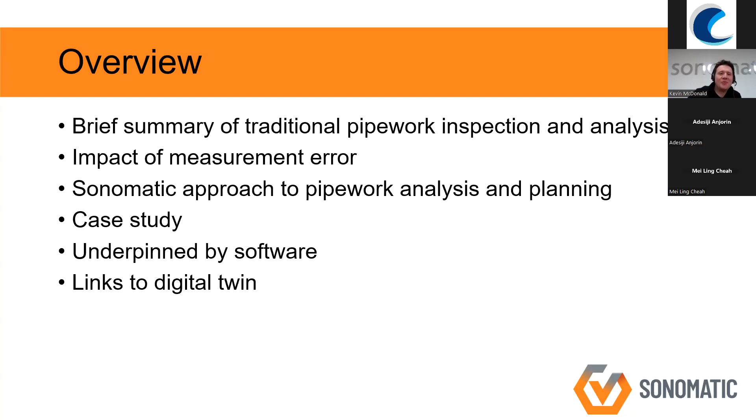Beginning with an overview of pipework inspection and what happens in traditional settings. It's mainly used extensively with manual UT and radiography. Someone will go out and take a spot reading at a predefined inspection location. This is then recorded in a database along with all the other readings that's ever been taken on that specific component at that same location.

And then there's some analysis subsequently performed on these readings, generally quite limited analysis. This does amount to quite low coverage - in some cases as low as 1% inspection coverage for the pipework circuit. Now, while that's an acceptable strategy if you've got predictable or extensive corrosion within the circuit, that can be problematic if you've got random or localized corrosion, because you're very unlikely to find it based on that sort of rigorous fixed approach.

Coupled with that, these two points largely go hand in hand. So if there's any issues at a particular location, generally actions are taken on a per location basis, and only what I've called panic readings are acted upon. What I mean is, if a reading at a specific location has seen a noticeable drop in thickness since the previous inspection, that tends to be focused on and acted upon in isolation. From what we see, it's not often fed back into the planning phase to take account of other locations that could be seeing similar service, which may need additional focus in the future.

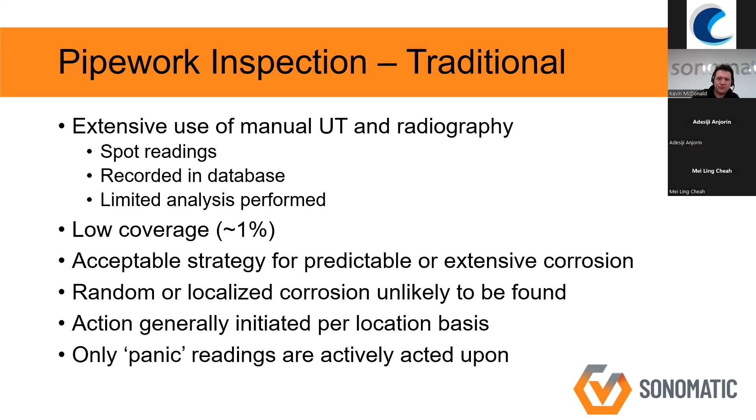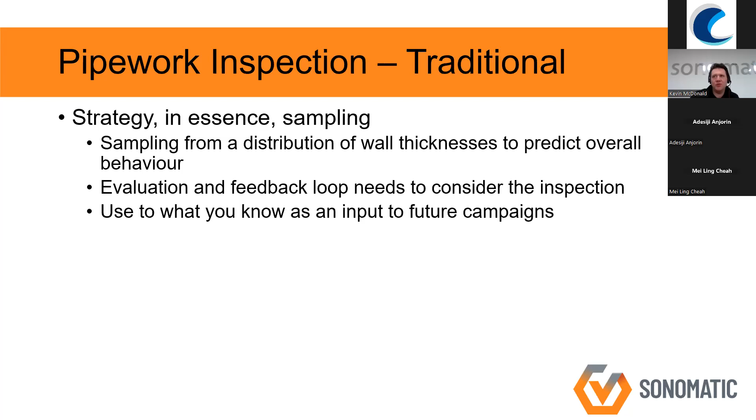However, that strategy does, in essence, become statistical sampling, because what you're doing is taking a distribution of thicknesses in order to try and predict your overall behavior. However, what's missing from what we see is an evaluation feedback loop to consider the inspection, both in terms of what has gone before and what you're expecting to find going forward. In a nutshell, we try to use what you know as an input to future campaigns - use what you know to guide what you expect to find in the future.

I mentioned this may be impacted by measurement error, and what I mean is the analysis on spot readings generally amounts to a corrosion rate calculation, which is just the difference between the two readings divided by the time in which those readings were taken. That can be heavily influenced by measurement error for several reasons. One is location, and that image on the right is my attempt to describe the impact location can have between multiple inspections.

So the point is, if you've got a pit, for example, in your first inspection you measure it accurately, and in the second one you get the exact same location, measure that same pit, and you will get a representative corrosion rate calculation at that location. If, however, you either miss it completely and catch it the second time, or partially catch it on the first and second inspections, then you're not going to get a true reflection on corrosion rate at that location, which can lead to incorrect decisions being taken.

Also, the technique deployed can have an impact. The probability of detection of ultrasonic techniques can vary from one technique to the other, and also the applicability of the technique versus what corrosion is being expected to be in place. Because the shape, the form of any corroded feature can have an impact on which techniques are most likely to find it and measure it accurately.

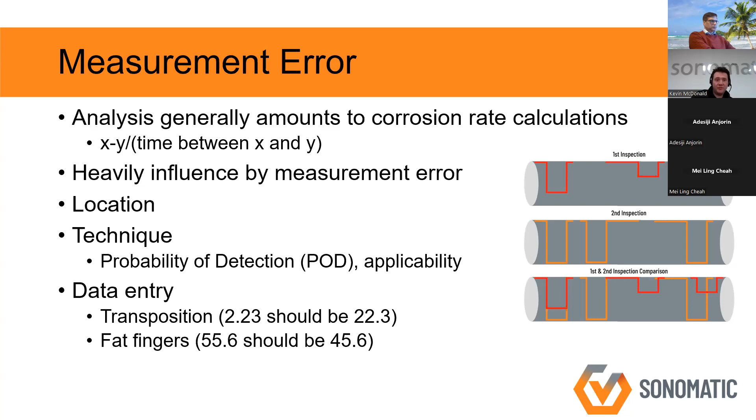So what we do as a company, we first try to understand the overall corrosion behavior and deliver an analysis based on that. It's probably easier to explain as I go forward, so we'll come back to that in a slide to explain in more detail what I mean by that.

What we do is we start with an overview of the whole inspection history and then drill down. We start looking at the overall trend of inspection data, and then start looking at individual groupings within that data that are behaving in a similar way, in order to start making good or better decisions based on similar behavior within your sample set.

So there's four differentiators compared to the traditional approaches, as I'm calling it. First, the recognition of sampling from a distribution that I mentioned earlier. Also, the response to measurement error - I'll cover how that's mitigated against as far as possible on a later slide. We also utilize an integrity group-based corrosion rate and corrosion coverage information, which I'll cover with examples slightly later. And then finally, the aim is really just to improve efficiency and effectiveness of the whole inspection cycle - essentially just making better use of resources as a whole.

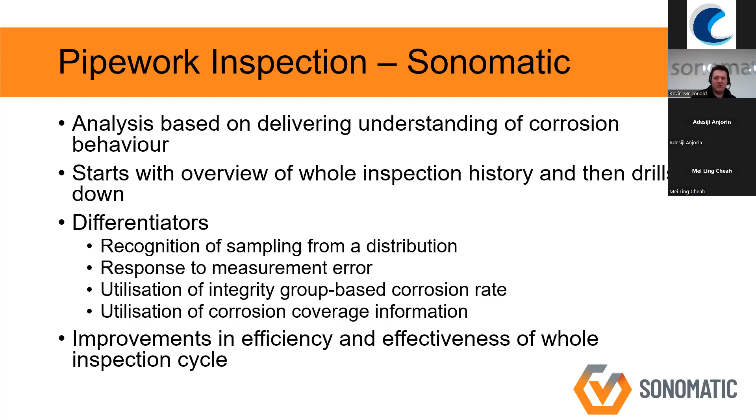The other thing that needs to be considered is how corrosion is behaving spatially, which is something else we see that isn't often considered in terms of pipework inspection. So it may not look like it, but all these images here have the same minimum value, but they look incredibly different. The point being, depending on how your corrosion is behaving, this will have a significant impact on your inspection strategy.

Because if you take the top image, for example, it's very heavily corroded, very extensive, and very uniform. So if you take a small sample from that particular piece, it will give you a lot of information on exactly what the overall behavior is. However, compare that to the bottom image - there's one single isolated pit, and a low coverage approach means there's a good chance you're going to miss that pit if you just take a small sample. So it's something else that needs to be built into and reflected within the inspection strategy.

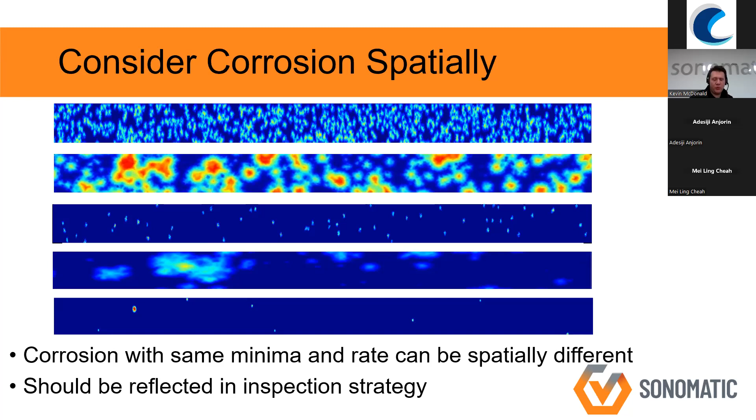So what we do initially is we start with box plots, which gives an overall inspection history in one view. For those that don't know, a box plot is just a way of visualizing a data set as a whole. On the x-axis here is inspection year, and the y-axis is a normalized value. The normalized value is the inspection result divided by the nominal thickness, in order to allow various schedules of pipe to be compared initially in one go. The reason for that is, often within a pipework circuit, you can get multiple diameters, multiple thicknesses, all within the same circuit.

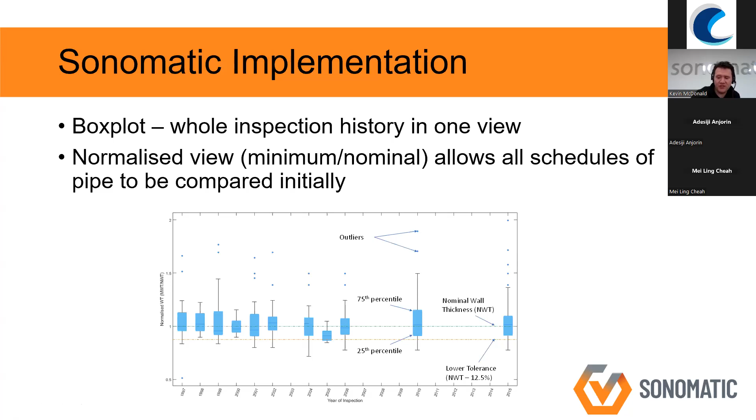The reason we do this is because box plots are a very good way of giving an initial overview of long-term trends. The image on the right shows a circuit where there's been multiple inspections ranging from 1997 up to 2015, but it's largely stable. There's been minor variation in the overall value, but there's no evidence of a downward trend here. Nothing that would be significantly concerning if we were to see that, certainly on a standalone basis at least.

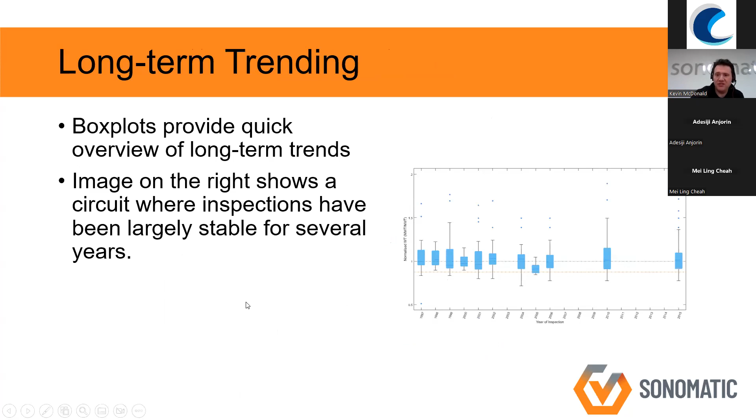This is an entry point, for the reasons I just explained. It raises questions based on the knowledge of the circuit. We would just give a very general, quick initial overview of what we're seeing in terms of general behavior, before we would then look to take that insight and look at the groupings of various data points to gather everything that's behaving in a like manner together. That could be based on materials parameters, could be based on feature types - straights, bends, etc. It could be based on process groupings. Diameter is another one very common.

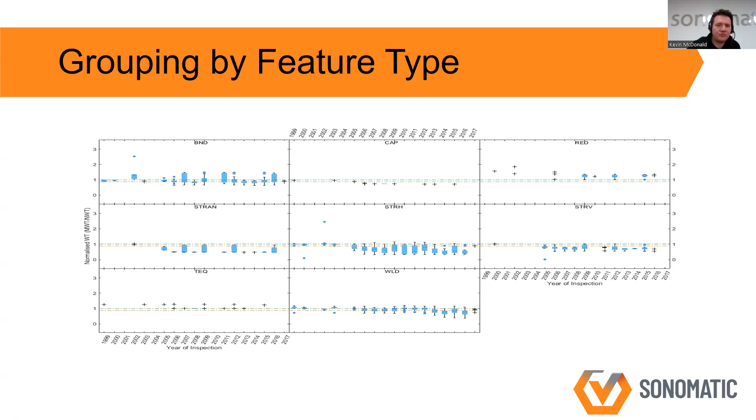So I mentioned that group-based integrity corrosion rate. How we produce our corrosion rates is we do trending based on each particular grouping that we identify as being of interest or of relevance, and we trend on the wall loss percentile values - in other words, the nominal minus the difference between the minimum value and the nominal thickness. The reason for that is because looking at group trends and taking a more long-term view does mitigate against measurement error that I mentioned earlier.

It mitigates against it in the sense that we just accept that it will happen, because there's some things that you will never eliminate in terms of measurement error. By taking a more long-term view and spreading that over the history and all the data that has been gathered, it will never eliminate the measurement error, but it will nullify it as far as possible. The reason being, it does allow us to make more accurate short and long-term corrosion rate calculations.

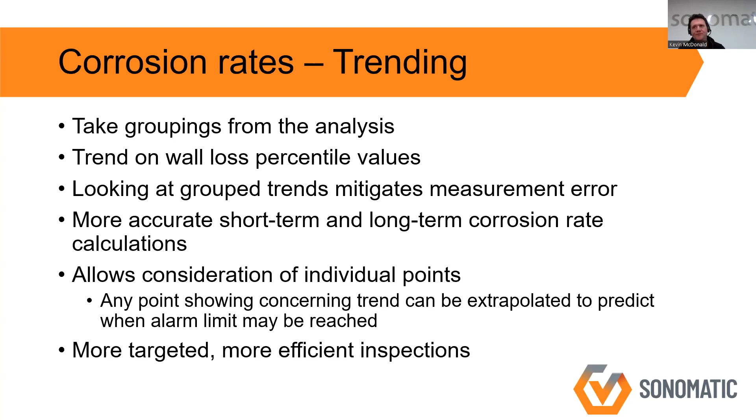However, we can also just take a consideration of individual points. I mentioned earlier that some points may see a noticeable drop in thickness for whatever reason, so that also can be built into the analysis. We can isolate a single point and, if necessary, do trending based on the behavior at that single point rather than a group-based activity, to predict when, for example, an alarm limit such as minimum allowable wall thickness could be reached. That may allow you to build in better planned replacements and repairs, with a view to having more targeted and more efficient inspections using the data that you have at your disposal.

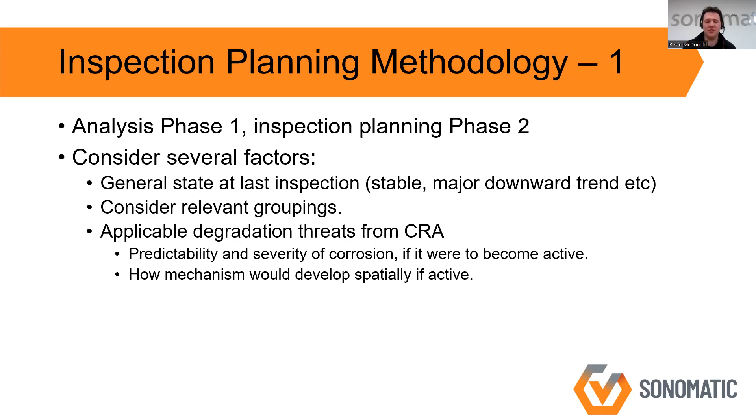In other words, how predictable are the identified mechanisms of legitimate concern? How severe would they be if they were to become active, and how would any mechanism develop spatially if it were to become active? Would it be very localized, for example, or would it be more general and quite uniform in terms of how it would propagate spatially if it were to become an issue?

There's a lot of information here on these next couple of slides. I'm really just describing what we do, and it's probably best illustrated within my case study example, but I thought best just to go through it anyway.

So we first start by defining a corrosion state—in other words, what we would expect to find. If there's no evidence of corrosion in the circuit, then we would hope to continue not to find anything. However, if there is corroded material, then again we would look to better quantify that.

If necessary, we can define a corrosion coverage from previous results—in other words, just the extent of the corroded material that has been seen previously, and that has an impact on the choice of corrosion coverage.

We also define any thresholds of concern based on historic results, relative to the normalized wall thickness. So, for example, if a pipework circuit has seen no evidence of degradation in the past, then a threshold of concern would be somewhere around nominal thickness, and the specific choice would be driven by exactly what the circuit was telling us, but in general terms that's what we'd be looking at.

We'll also look to consider points flagged as under- or over-inspected and determine if there's any reason for that. Sometimes there are legitimate reasons for certain locations being under-inspected, access for example, or if a point has seen a lot of inspection in the past, we could also identify if there is a reason for that.

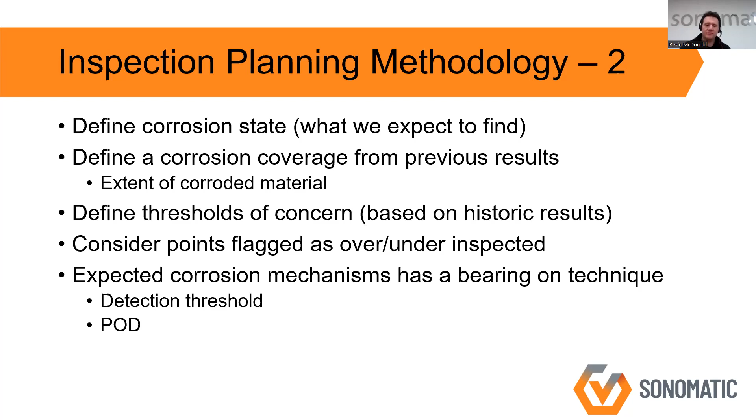There is also an evaluation phase that we use to assess if our predictions were correct, to be perfectly honest. In other words, did the inspection reflect what we expected to find?

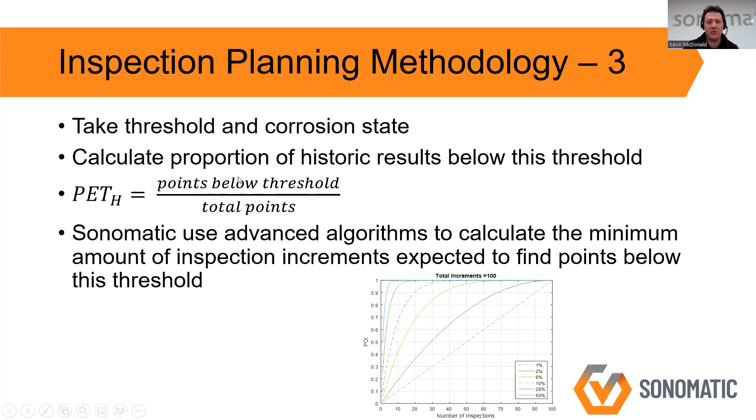If they were broadly similar, approximately the same, then you can say the finding reflected reality. However, if there was a marked difference, that would need to be considered immediately in order to go back and do some more inspection to determine the extent of corrosion, if it was found and was unexpected. Or similarly, if we were expecting to find corrosion in a certain area and didn't find it, that could also be built into inspection planning going forward.

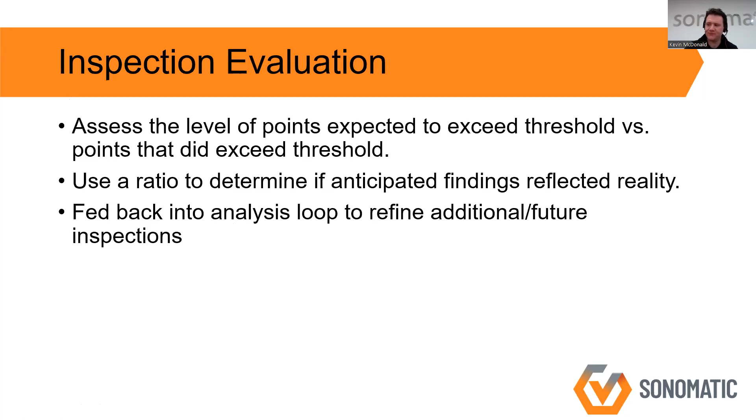In order to perform this analysis, we have developed a software called SPiDARS. It stands for Sonomatic Pipework Database Analysis and Reporting Software. I know it's a bit of a mouthful, but we seem to fit the acronym quite well. The point is we can accommodate many data formats.

Predominantly, the historic readings are given to us in the form of Excel sheets mainly, but there are various other data formats that we can upload into the analysis software for our database.

The data is also screened on upload for any spurious points. It will come out as a flag. So if a single point is showing a significant difference from all the other points around it, then that will be flagged to say this point may well be spurious, and it would be investigated by the operator at that point, and would either be quarantined or included depending on whether the reading was considered genuine.

There is an automated and electronic reporting function built into the software. As we go through, we can populate various graphs and also link comments and descriptions to those. There's a push button option which will spit out an electronic report to detail the analysis.

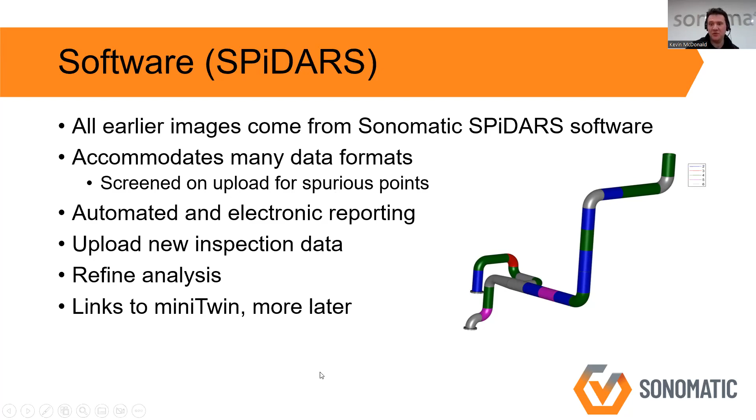But this is one image taken from an aspect of the mini digital twin, by way of a preview, spoiler, whatever you call it. But before I get to that, I'll just go over a case study quickly to illustrate the methodology in a little more detail.

So for one client, we were provided a huge amount of inspection data. We got almost 6,500 Excel workbooks with historic readings. That amounted to just under 22,500 individual Excel sheets. I can't remember the exact number of data points, but it was hundreds of thousands of data points contained within these Excel sheets and workbooks.

We did some data mining of unstructured data. Some of it didn't have the information associated with it that it should have, so we did some mining to fix that essentially. We also reviewed the data to make choices on the optimal method for this particular client and how to best implement our methodology for them.

Data was in a similar format, not identical. What I mean is that when we were given the data, a lot of it said the same thing but was presented in slightly different ways. For example, some reports were given in Word format, others were in PDF. So we had to do a little bit of work to wrangle all the reports and readings into a single readable format so that it could be uploaded into our database.

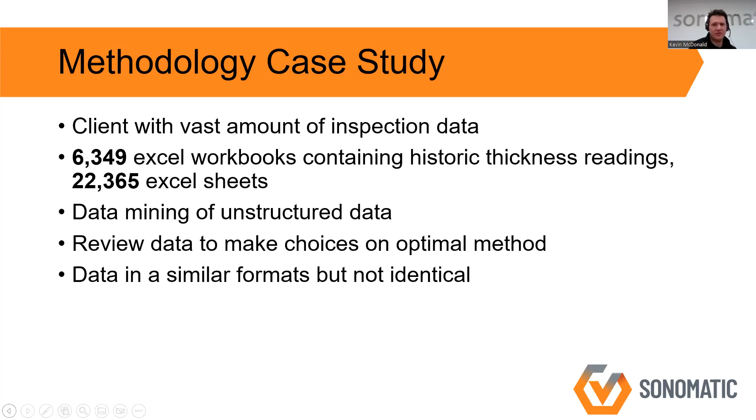This one obviously wasn't excluded. It would have been flagged in the initial uploading into our database, and it was deemed that it couldn't be definitively said to be spurious. So we left it in order to investigate a little bit further.

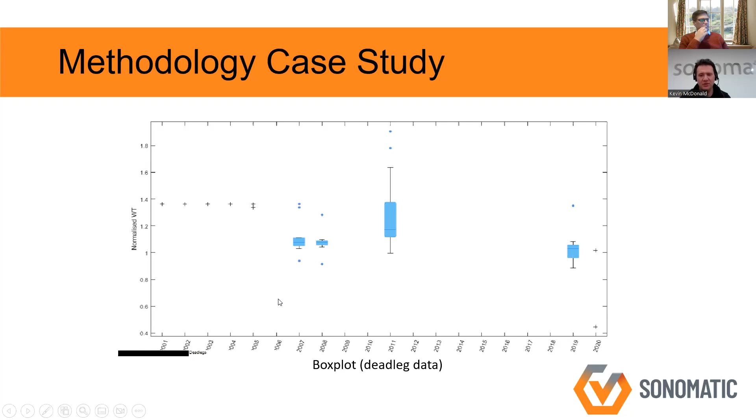So in order to plan the inspection for this particular circuit, we looked at the predicted corrosion coverage using cumulative thickness distributions, which are plotted using the normalized thickness data. For those that don't know, a cumulative thickness distribution is just a way of visualizing a data set. It's plotted on a logarithmic scale, so for example this is 100, 10, 1. 100% of your data points are up here, then this is 10%, and this is 1%. It's a very good way of visualizing any differences in behavior within a data set.

It's also how the curve behaved in terms of changes in shape or kinks in the curve that is a very good indicator of whether or not corroded material is present. This curve on the left, which comes from the non-dead leg data, is a very classic normal curve, as normal as you can get really, in terms of thickness data. It's a smooth reducing trend, so there's not really any evidence of corrosion within this sample, although it's quite blocky, but that just comes from the nature of the data in this particular instance.

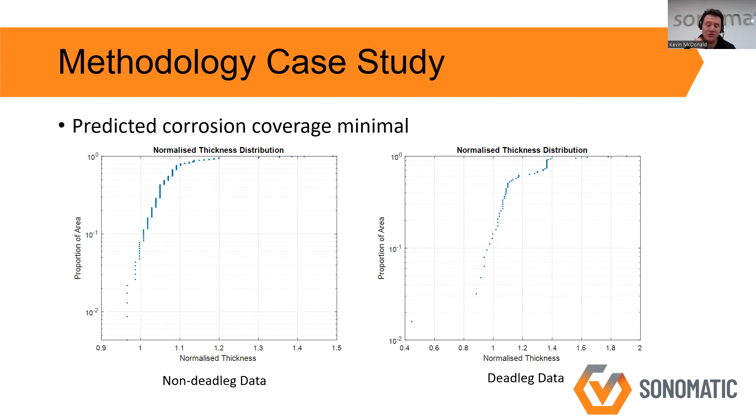However, when you compare it to the curve on the right, which is the dead leg data, it starts off and then very quickly there's this change in shape. This doesn't follow a normal smooth reducing trend. There's a noticeable kink here and it kicks off and goes somewhere else. So that is a very classic example of corrosion within a cumulative thickness distribution curve at the very least.

So in terms of how we implemented our methodology for inspection planning for this one circuit, given that the non-dead leg data was showing very general stability, we wanted to confirm the absence of corrosion there. In other words, we would be concerned if there was a significant increase to any proportion of points significantly below the nominal thickness. So we set a threshold of 0.97 of nominal for the non-dead leg data.

Given the corrosion risk assessment, the morphology of the corrosion that would be most likely would be very localized if it was present. That was just based on the risk assessment and the highest ranked threat within that assessment. Our corrosion rate calculated on the non-dead leg data was 0.03 millimeters per year. However, it was a significantly higher rate on the dead legs, given the single point.

What did transpire to be genuine had to be looked at going forward. So based on the various considerations, we recommended an inspection coverage of 15%, with a particular recommendation to focus on one line in particular, for two reasons.

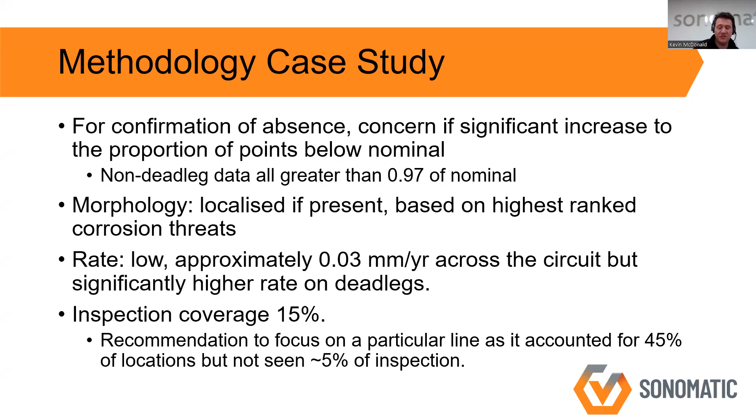So moving on to how this fits into our digital twin. Just a bit of background for anyone who doesn't know. A digital twin is a digital replica of a real world component used for multiple factors.

It can be used for simulations for various reasons, can be used for testing of various things. For us, we use it really just as a means of aiding access and visualization of information. Within the oil and gas industry, that amounts to either representation of something quite large, such as a platform or refinery.

You could then go into more individual things such as pipework circuits, which can still be quite large depending on how many lines and how long they are. Or something like a pressure vessel can also be considered within a digital twin environment. We mainly focus on the last two, pipework and pressure vessels, but we can build something up to platform level if required.

We see that the big selling point of them is it's a very easy, quick way to share information and visualization of information and data with multiple stakeholders.

We've had comments from a number of clients saying their frustration is often having to present things to non-technical people. If they had something where everything was well contained and easy, almost like a click of a button, things could be called up and easily shown and visualized. They found it much easier to explain to stakeholders within their organization rather than trying to flick through reports, for example.

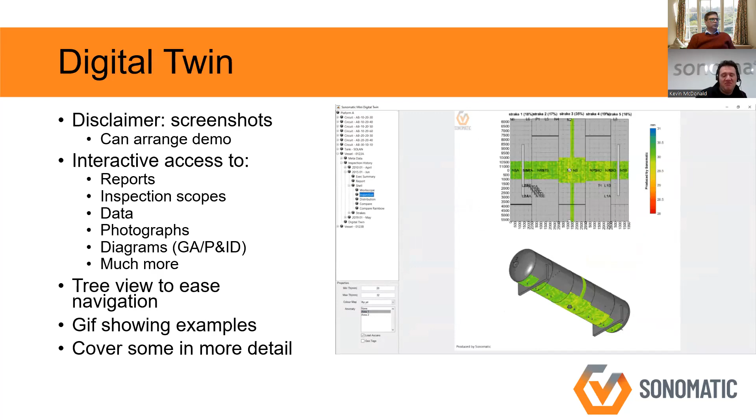You'll see thickness maps, for example, on the pressure vessel as it goes through. We can also include any photographs, diagrams, for example a GA or a P&ID drawing, or really much more - frankly, anything you have that we can get access to, we can certainly include within the structure.

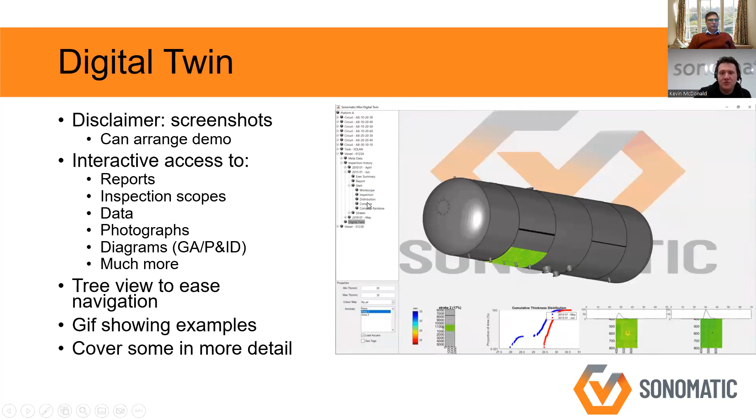It's all done in a tree format, and with just the click of a button you will get whatever is within that category - the various different documents or data files associated with that component - and you can quite easily call them up and read them in more detail. I'll cover some of this in a little more detail as I go through.

We start at a site level and then move down on a component or circuit basis. You can see this is site one, created for the sake of an example. So if you go to site one, there are a number of vessels and pipework circuits, vessel ABC. Within here there's a data sheet, a digital twin, a GA, homepage, P&ID, and for example purposes we could include a dashboard. There's some inspection data embedded within here and images from a particular strake.

The models are created when needed - in other words, we wouldn't do this blanketly for every application. We would only want to do it when someone actually wanted or felt it necessary. Obviously when we're building a digital twin we do need to build the model, but my point is we wouldn't implement it willy-nilly.

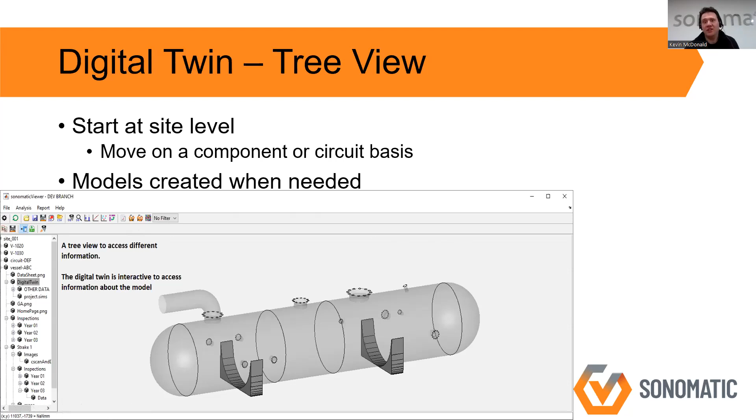We also can have interactive access to inspection data. Again this is straight from a pressure vessel, because I find it's an easier example to visualize and show, as you can show more data here than anything else. So we can show the inspection data, show statistical distribution, and perform some additional evaluation within that.

Levels of access, what I mean is we could have someone who was qualified to go in and process or look at inspection data if needed. However, someone who just wanted an overview of a particular component would have different access requirements, different access privileges. They couldn't then go in and amend stuff that they shouldn't be, to be perfectly honest.

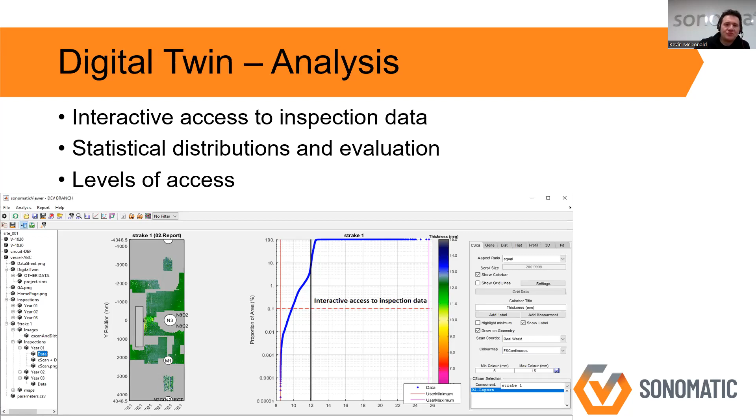There's a pit modeling feature also within this, so we can focus on an area of concern. For example, here there's been two inspections performed in subsequent years on this particular asset component. We can focus on an individual area with a function we call lassoing, drawing a box around that area. We then get the cumulative thickness distribution from that area, and also produce a profile view from a horizontal and vertical slice of this pit to get an idea of any changes between those two inspections.

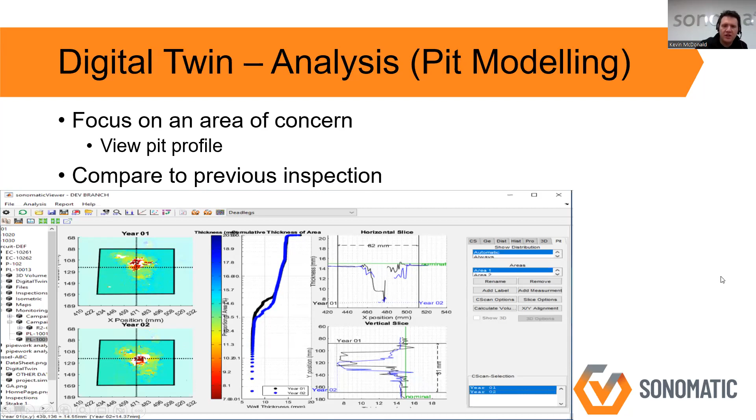In addition to the profile view, the pit modeling profile views, we can also visualize a 3D slice through the component of a single pit. This is also interactive, so you could rotate this if you wanted to. Obviously this is a screenshot again, but within the actual software we can rotate this, or the user can rotate this, so they can best visualize any pits within their data.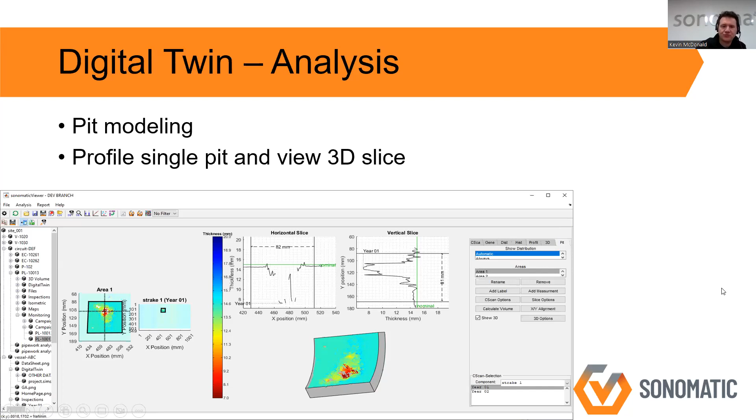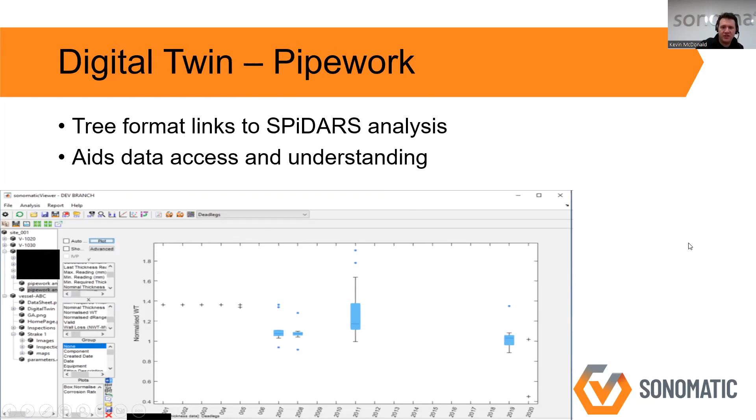So there's another GIF here, slightly different to the one shown earlier. Just an example of how we would display information using our digital twin relative to the pipework. There are pressure vessels again within this particular GIF, but as the pipework comes up you'll see the type of information we can show—an image of a snapshot of the parameters of the particular circuit, showing the diameter and thickness, for instance. Then the various different colorings, as you see it flash through, are displaying various pieces of information about that particular circuit.

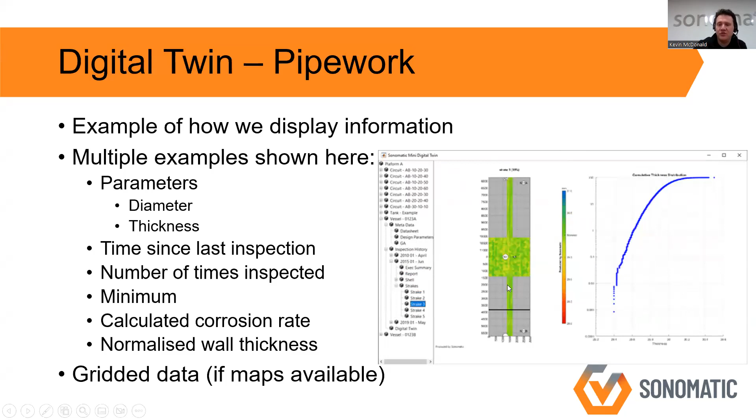So the time since last inspection, the number of times it has been inspected. We can also include the minimum thickness, which would just be colored on a grid basis. Each of these sections that changes color uniformly is an inspection location defined according to the inspection procedures of that particular client. We're just coloring according to various different source information—when it was last inspected, how many times it's been inspected, the calculated corrosion rate, wall loss at that particular level, that particular location. That is just grouped or colored uniformly across the whole location.

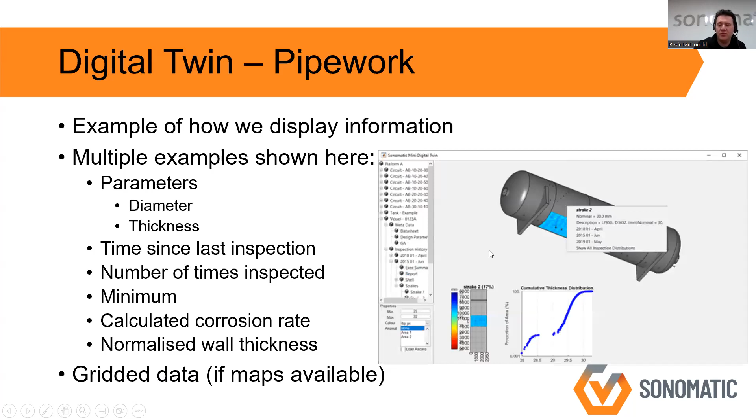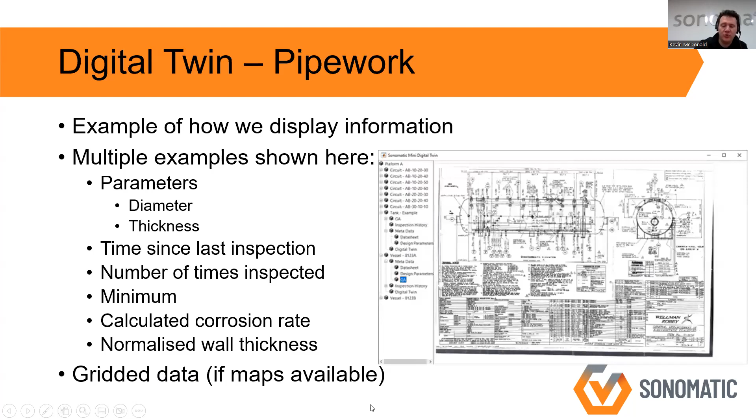We can also include the normalized wall thickness. We could include grid data, so corrosion maps, for example, and we could also superimpose that onto the digital twin. So when the pipework is shown here, we could include corrosion mapping data if it had been obtained within the digital twin as well.

How it's all housed, I suppose, is the point of this slide. The inspection recommendations from our SPiDARS software will be fed into this digital twin for ease of issue. Data extrapolation can be done within digital twin if required, but also can be done within SPiDARS. They talk to each other, so it's really user preference on who does what.

The point I mentioned early on is that doing an extrapolation on a single data point would be to flag when repair or maintenance may be required, in order to better plan resources. The whole crux of it is to aid efficient inspection planning, optimize resource allocation, and streamline costs. Because you use what you know to better inform what you expect to find, you can make decisions on applying the right technique at the right location to maximize the value of the data, and make best use of resources in terms of people and equipment for efficiency.

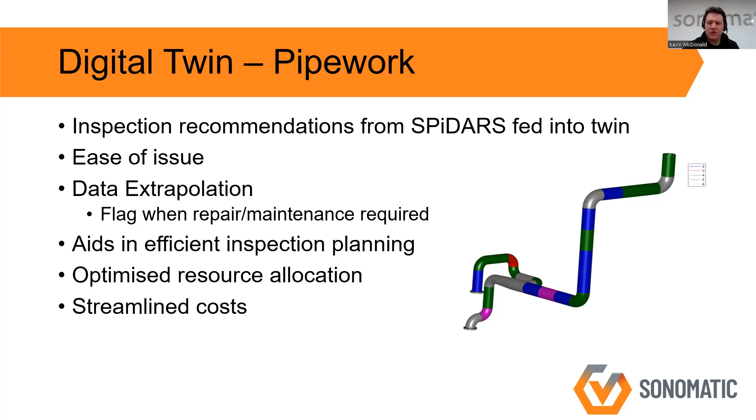I think that's all for me. I hope that was informative. If there are any questions, I'm happy to take them. I hope it was useful. Thanks.

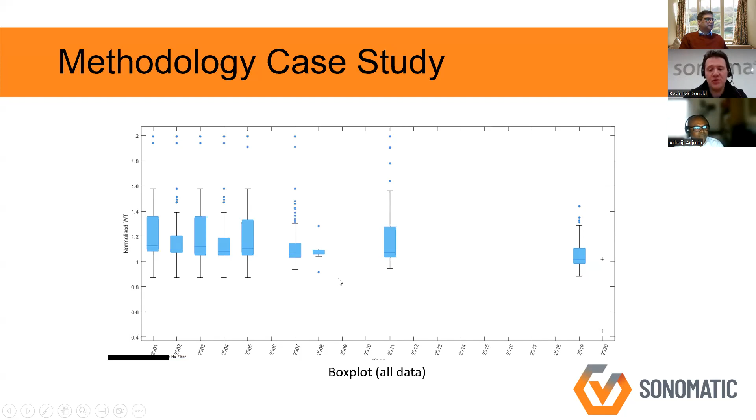So can it capture anything like high corrosion rates? Yes, any high corrosion rate would initially be reflected within a box plot, you would see it. There's a better example if I go back earlier. For instance, there would be a very high corrosion rate between these two points here, 2004 and 2005, if we consider them as two individual inspection years. Corrosion is illustrated by any downward trend within these box plots. We would use this as a basis to investigate points further, because when you drill down, corrosion rates could be even higher within these box plots. So we would look to identify groupings behaving in a similar manner to make a more accurate representation of the corrosion rate. Does that answer your question?

It does. Cheers, thank you very much.

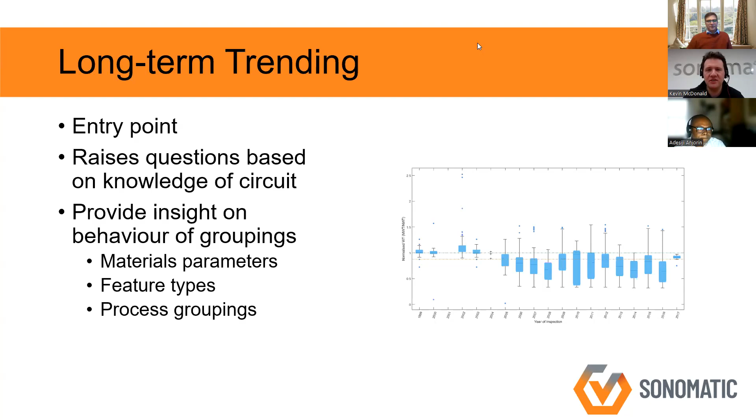Map or a component. If I stop sharing my screen briefly, I will try and find an example to show you. But the point of it is, it's a visualization of all thickness readings from a single source. It could be from a strake of a pressure vessel, or it could be from a pressure vessel as a whole.

So if I share my screen again, this is actually from a training slide set for new starts. If you take, for example, a corrosion map or multiple corrosion maps, you then plot all the data points using a cumulative thickness distribution. That basically sorts all the points and places them on a logarithmic scale.

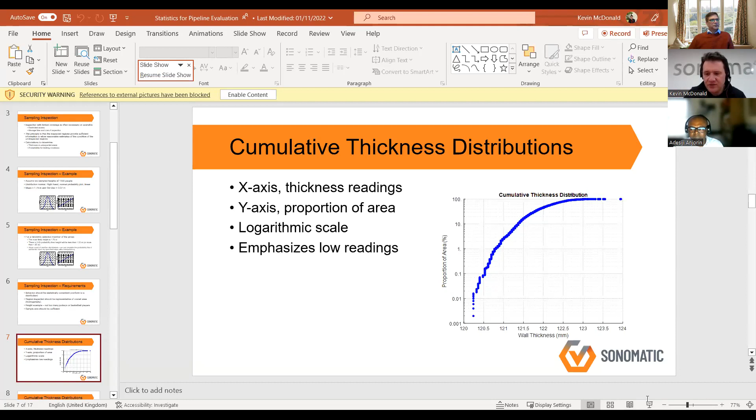So if this, for example, was to be a strake of a pressure vessel, you can see there's approximately... this goes up in a factor of 10. So this is 10% of the data, and this is 20% in the next line up. So approximately, say 17-18% of the data in this particular region was measured at 121.5 millimeters or less.

If you jump down slightly further, 1% of data was, let's say, 120.7 millimeters or less. So it's really just a way of visualizing the proportion of data points at the range of thicknesses within an inspection data set. So an indication of the spread of the data.

Yeah, so as I said, the proportion of each point. For example, I'd say that this represents 1% of data, so 1% of the data is at this value or less. And plotting it in this manner also gives an overview into what

the behavior is in terms of corrosion activity. So this is a largely normal curve because there's a minor deviation there, but in general terms there's a very smooth shape to this. So that's not indicative of corrosion.

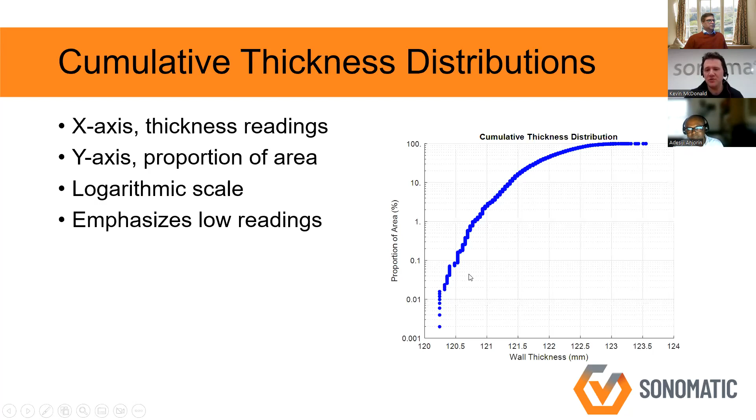However, if you compare it to the next one, this is a very noticeable break here. This is the point at which corroded material is starting to make itself known within this particular data set. The break in this curve is at 13.1 millimeters and affects 22% of the inspection area. So 22% of this data set is affected by corrosion - that's what this curve is showing.

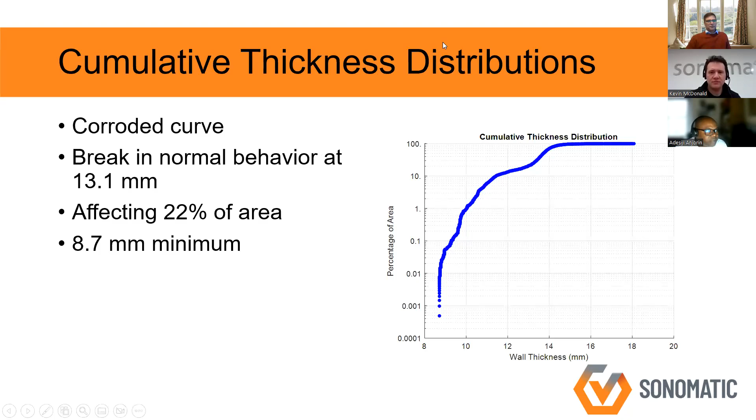All right, thank you, Kevin. We have 4 questions from the audience. I'll take the first one from Ravi Shankar Siriki. The question is: is it possible to define corrosion classification like HIC or stress corrosion cracking, etc.?

Within the analysis, to define individual mechanisms, no. It would give insights into what types of mechanisms it could be in terms of how they were behaving. So the shape, as I said - I'm not sharing my screen again, apologies. Okay, thank you, Kevin.

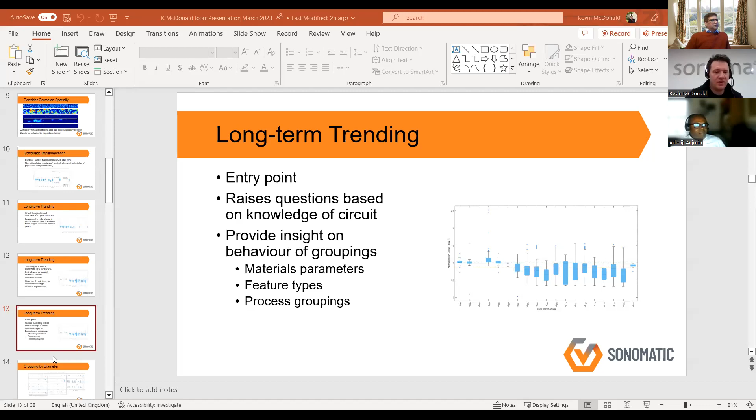No. Oh, thank you, I'll go. Thank you, Kevin. Right, another question from one of our attendees.

Are you more concerned with false positives or false negatives when determining feature or lines with diverging behavior? And what steps do you take to avoid either?

I don't want either, to be perfectly honest. I wouldn't say I'm more concerned one way or the other. To be frank, what steps do we take? As I say, the data being screened and uploaded is the significant one, so we can very quickly identify anything that could fall into one of those categories to investigate further.

If it can't be definitively ruled out on an initial first pass based on being flagged by the algorithm, then we can dig into the data more in terms of the groupings to determine what points could and should be quarantined from the overall analysis to best inform the corrosion rate calculation, just like in the case study where you had that outlier which required investigation at the end of the day.